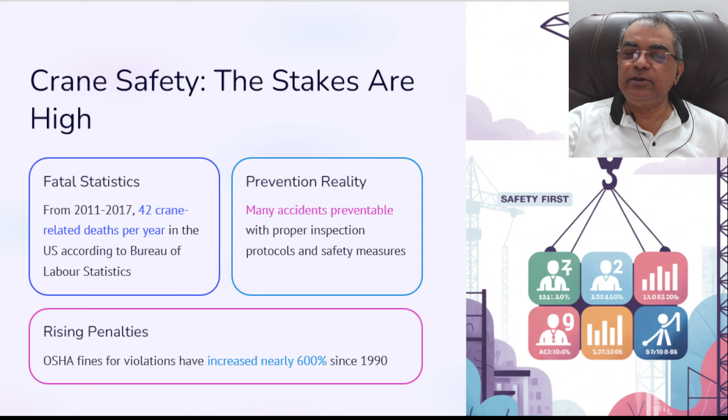since 1990. It is a US statistic because they are collecting and analyzing. In India, nobody bothers what is happening. So, OSHA top crane violations. What are the top crane violations OSHA has found? Inspection-related violations cause more citations than the next two violations combined. This stark reality underscores the critical importance of inspection and maintenance.

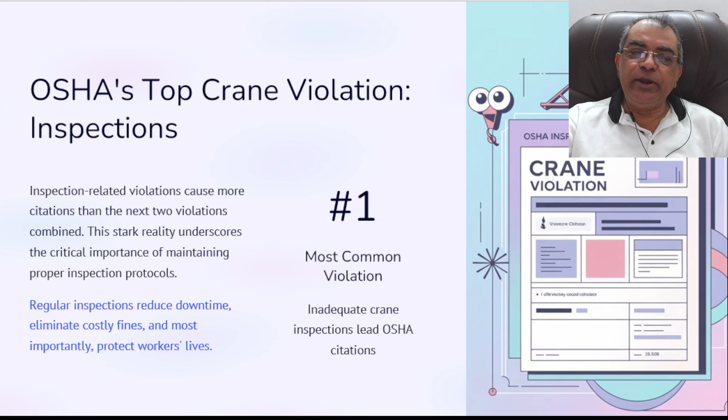So regular inspection reduces downtime. That is the first thing. That's why this video is very important for you. Because if regular inspection is there, before it fails you can identify the problems and rectify them. Inadequate crane inspection is the first cause. That is why things fail.

In the regulatory framework, just try to remember which OSHA regulation applies where. Code of Federal Regulations 29 CFR 1926 Subpart CC: if you are working anywhere in India or the Middle East, multinational companies investing in India will follow the OSHA regulation. So this number you have to remember: cranes and derricks in construction, comprehensive safety requirements,

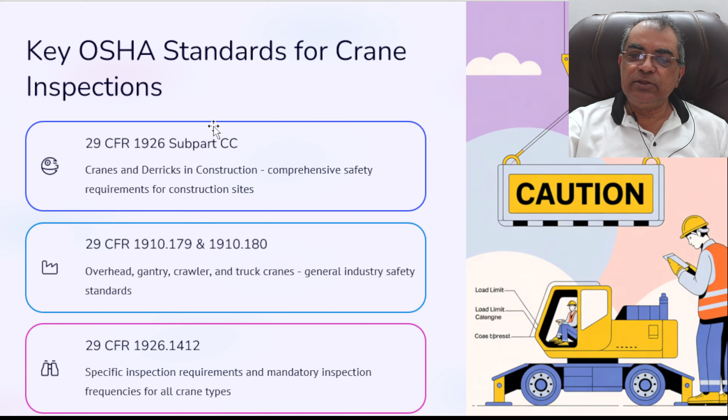and 29 CFR 1910.179 and 180, and this one, 1926.1412, is for the specific inspection requirements and mandatory inspection frequency for all crane types, which is what we are going to discuss. These are related to the different types of cranes.

So who must inspect the crane? First, a competent person is required. The safety officer should have knowledge of inspection and the components of the crane. Cranes are very important for all HSE professionals. Only then can you supervise and monitor whether the inspection is done properly and frequently. They must possess knowledge of crane operation and a thorough understanding of OSHA regulations.

Flexible staffing option: it can be an on-site employee or qualified third-party inspectors. For the yearly inspection, it is definitely not done on-site; it is a third-party inspection and certification. Every 6 months there is also a third-party certification of the below-the-hook items and outriggers, the lifting tackles.

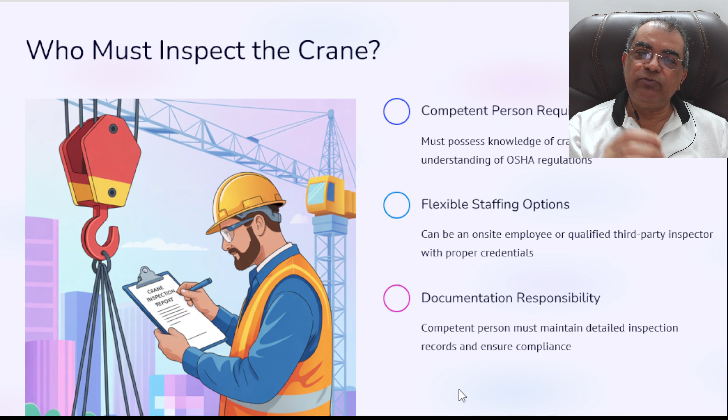Documentation responsibility: the competent person must maintain detailed inspection records. Whatever inspection you are doing, you have to use a proper checklist, inspect it, and keep it as a record. I will discuss what types of inspections there are for cranes.

So the types and frequency of inspection we are going to discuss now. First of all, daily inspection. We used to give a small one-page checklist with all the dates on top. The driver will inspect, certify it and keep it with them, so that when you go to site you can ask for the pre-shift daily inspection. It will take 5 to 10 minutes.

So, operator can do it. Monthly, some of the site mechanics will do it, and we used to put the inspection sticker that this inspection was done, and it is a detailed inspection, every part we used to do. The mechanic who is doing the inspection should be qualified and know the cranes and all the components, and definitely you as HSE officer are going to certify it, so you also should know.

So annual and periodic inspection, maybe 6 months, 1 month, 3 months, yearly, 3 yearly, whatever it is. So thorough and full inspection by the third party and get the certificate. If it is modified or something has got damaged, all the inspections are null and void. Just remember it.

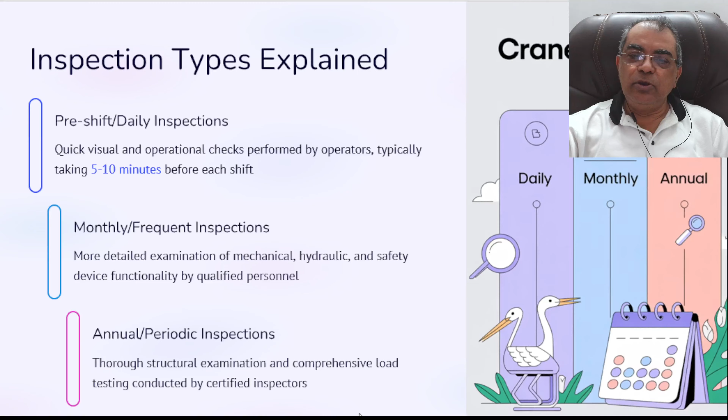So practical insight, balancing thoroughness and time. Daily focus areas are what we are doing in daily inspection. Concentration on obvious defects, for example hook, crane top, etc., whether the booms are moving or not, brakes are working or not, horns are working or not, outriggers are working or not, the pad is there or not. So everything you check, there are checklists

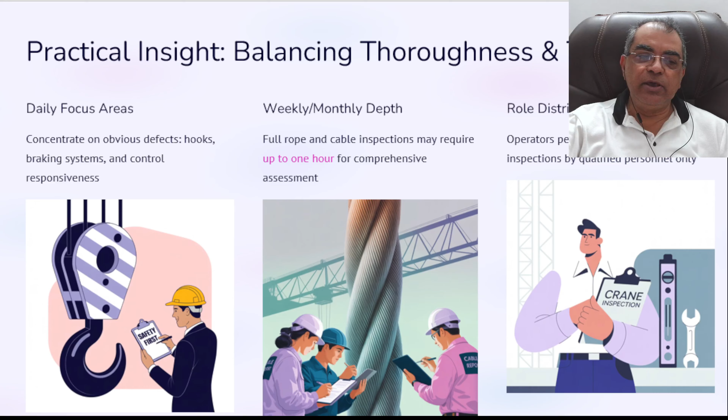that we can provide. So weekly and monthly inspection is a little bit more detailed. It includes the full rope and cable inspections and may require up to 1 hour for comprehensive assessment. Every month there is a comprehensive inspection, and as I have told, we used to put the sticker. So the operator performs the daily checklist, detailed inspection by qualified personnel, and definitely yearly or 3 yearly by a third party.

What to inspect? Key components: structural and mechanical parts, boom, jib, chassis, these things. The first part is inspect thoroughly for cracks, corrosion, structural deformation that could compromise load capacity. If you are inspecting the boom, check whether the hydraulics are functional or not, whether there is a leakage or not. So everything we used to check.

Second is wire rope and chains, chain drums. We used to go up, open and check whether there is a cut or any deformation or not. Check for broken strands, excessive wear patterns, and proper lubrication levels.

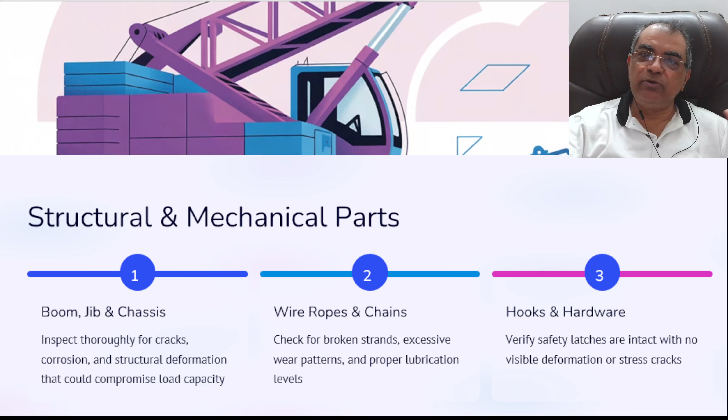The third is hooks and hardware. Verify safety latches are intact with no visible deformation or stress cracks. Okay, so I am only talking about the crane part. The other lifting components, lifting tackles and lifting gears, we will prepare another video on how to inspect them, what are the things and what should be the frequency.

Safety devices and controls: braking system, test its functionality and responsiveness under various load conditions to ensure reliable stopping power. Limit switches you have to test in a monthly inspection, and quarterly definitely it is going out, so you will get the certificate by a competent third party, which is certified by your client. Approval is required. Verify overhoist and travel limits are operational to prevent equipment damage and accidents.

Load and wind monitoring, whether it is working or not. Earlier it was not coming, but now whatever load it is lifting will come on the screen. Check load indicators and wind meter for tower crane, ensure accuracy and proper working. Nowadays all cranes are coming with all these features. What is the wind speed? Because above 20 miles per hour, no lifting is allowed.

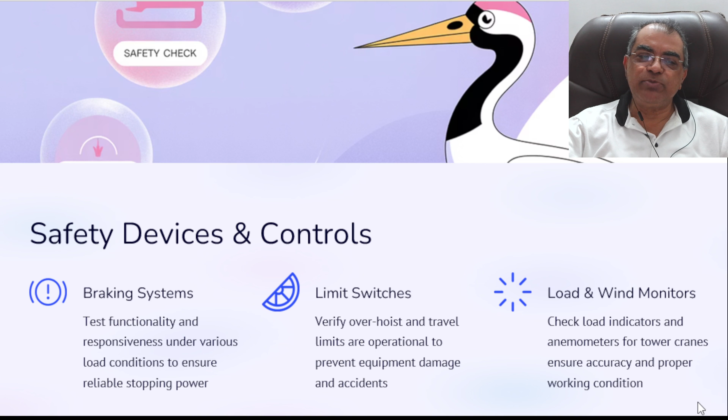So hydraulic and electrical operation, the people will inspect all these things. Electrical, they will check all the wirings, whether some deformation is there, or maybe due to time some carbon has come, whether some spark is there or not.

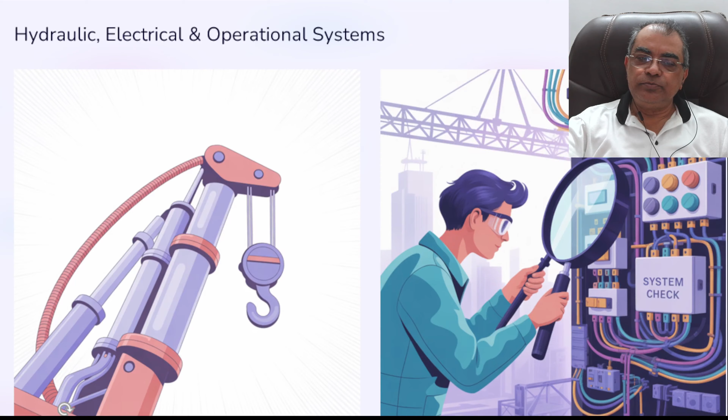So documentation and record keeping requirements. Legal protection, because it is a legal requirement to have the inspections, so if in case it fails, the insurance company will ask for all these documents: the third party certification, whether you are doing daily inspection or not, monthly inspection, what your protocols are. So legal protection, comprehensive records protect both workers and company from potential liability claims.

As I have told, OSHA has discovered that accidents happen because of the lack of inspection. So required information must include inspection date, inspector's name, detailed findings, because nowadays if you go to a construction site, they are just filling the forms.

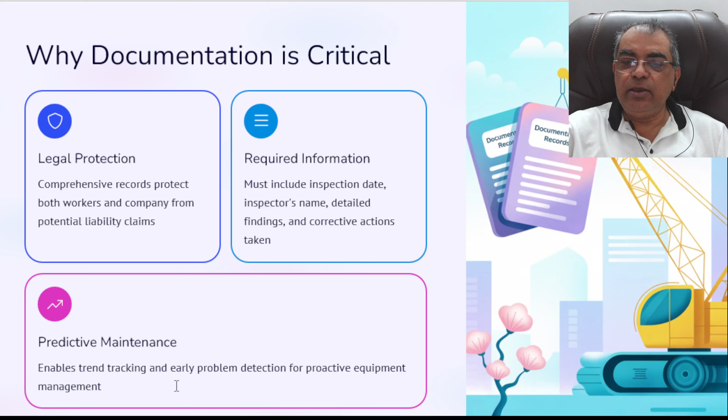That is very dangerous to do. Do it properly. Predictive maintenance: whatever inspections you have done, and as per the manufacturer, what is the maintenance requirement, whether they are done or not. Predictive maintenance enables trend tracking and early problem detection for proactive equipment management.

So best practice for record keeping is a standardized checklist for each type of crane. For all cranes you cannot have one. For each type of crane, truck mounted, crawler mounted, gantry crane, and others, you should have a separate checklist with the proper headings. This is for the truck mounted 50-ton crane, or a 120-ton crane, or a 360-ton crawler crane. So develop and use tailored checklists specific for each crane type and operational requirement.

Dual storage system: maintain both digital and physical copies that are easily accessible on site for inspectors. Because you have one office and different mega construction sites, keep them on the network in a folder, so that if anyone asks, they can immediately access that folder and produce the evidence.

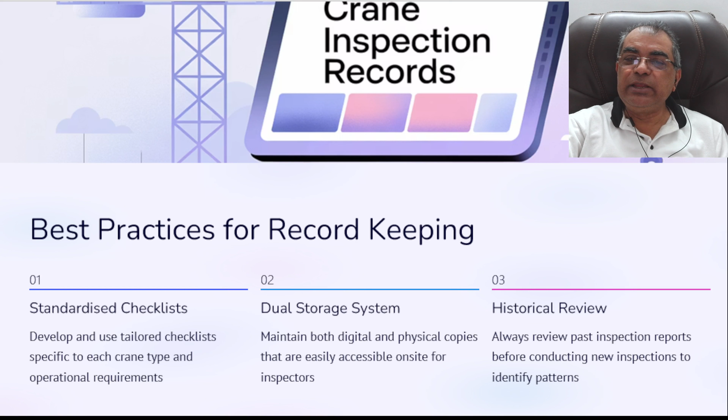Historical review: always review past inspection reports before conducting new inspections, to see what defects were found in the last inspection and whether they were rectified or not. After the inspection, you have to prepare an action plan: who is due and what is the timeline. If it is not rectified properly and you find it again, that will reveal that the maintenance was not done properly.

So, real world challenges and solutions. What are the common inspection challenges? Time pressure issue: we are very busy, we'll do it afterwards. Then afterwards it is a problem. Operators rushing or completely skipping the daily checklist. If you go to site, you will see that the daily inspection checklist is not done, they have just filled it. Once you have checked, the defects are there, but they have passed it. So you have to talk to the operator to do it properly, so that before it goes wrong, it can be identified.

Qualification confusion: widespread misunderstanding of the competent person role, requirements and necessary qualifications. It is a common problem. Any mechanic who is doing the greasing will go and inspect. He doesn't know about the cable drums and anything. I once asked the person who was inspecting, what is the role of the outrigger? Neither the HSE officer knew, nor the mechanic. If you go to a construction site, these are the major problems. Anyone who says they are a competent person will push for the inspection.

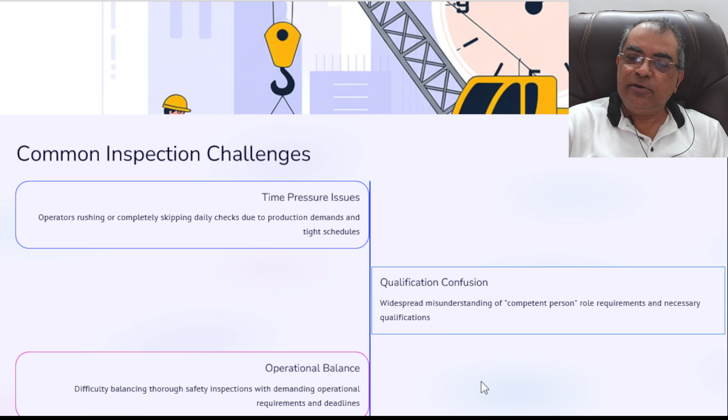Operational balance difficulty: balancing thorough safety inspection with demanding operational requirements. And, we'll have to finish it. Yalla, yalla, quickly, finish it quickly. You just fill it, fill it later on. We will let the crane go.